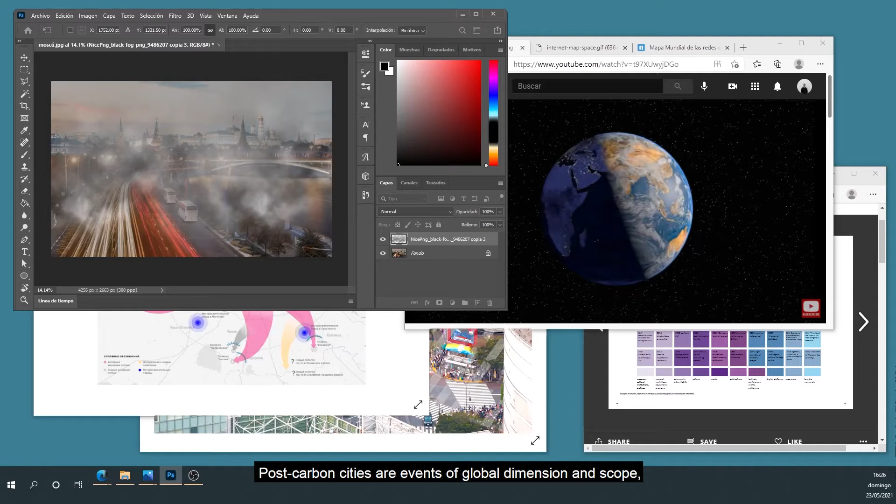Post-carbon cities are events of global dimension and scope, whereby architecture incorporates design flows, material, digital, cultural, and proposes alternative models that resolve future metabolisms of the planet.

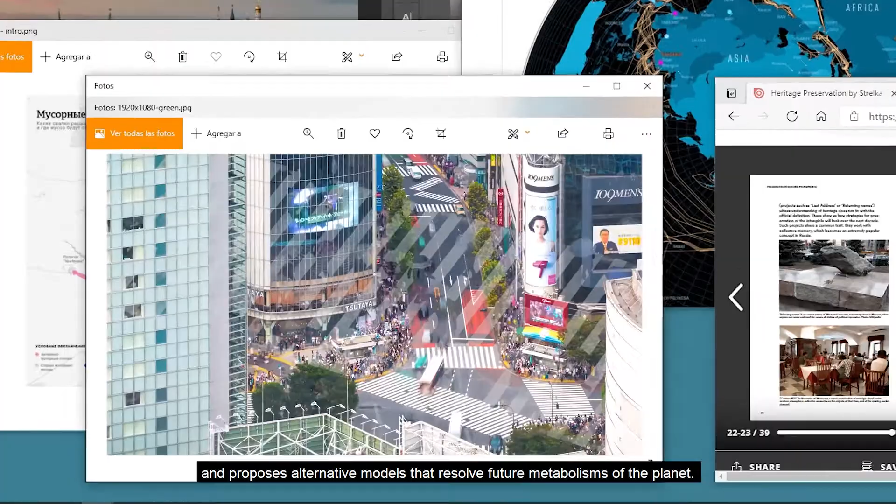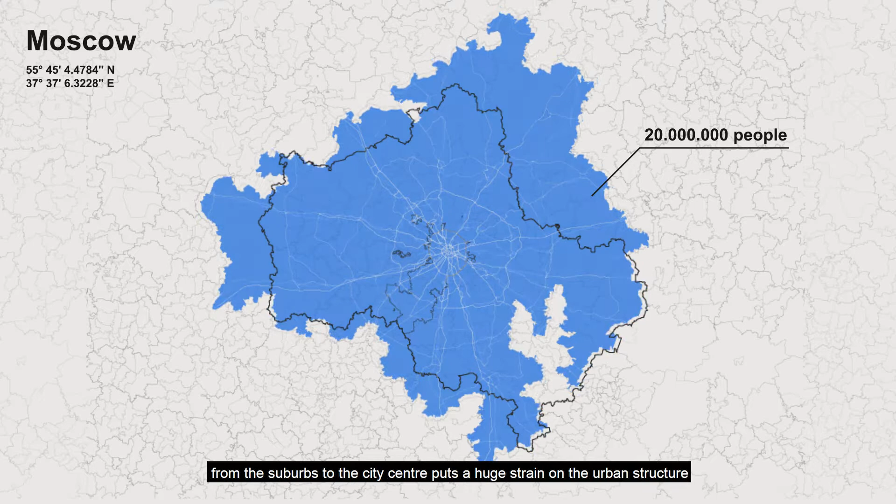The global growth predicted for the future is a social and urban challenge that is already affecting cities such as Moscow, where the movement of almost 8 million commuters from the suburbs to the city center puts a huge strain on the urban structure due to the increasing use of individual transport, which environmental consequences are already unfeasible.

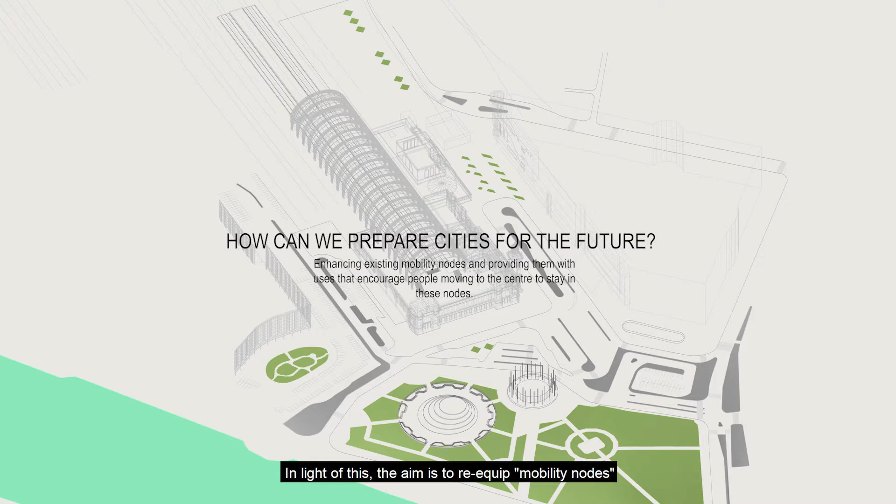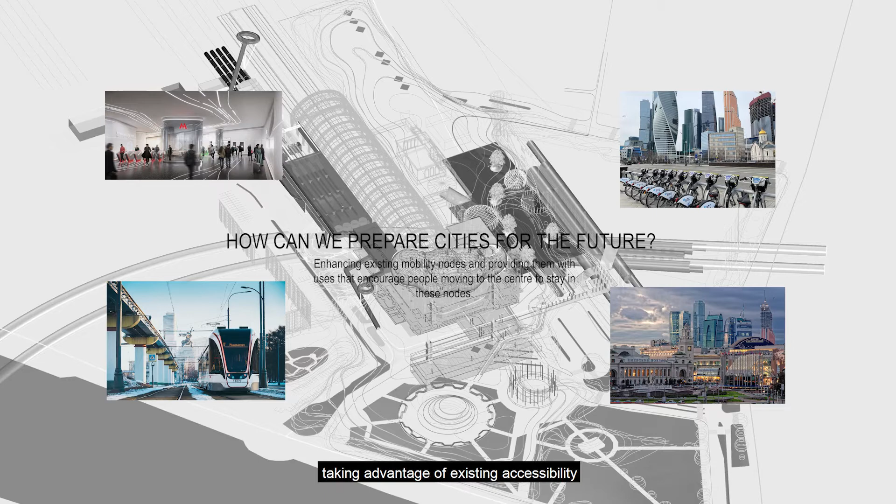In light of this, the aim is to re-equip mobility nodes such as Kievsky Station, which relate to initiatives that already promote the improvement of public transport on an urban and regional scale, taking advantage of existing accessibility to propose new necessary uses in a globalized future as a single intervention that provides a solution to three major challenges.

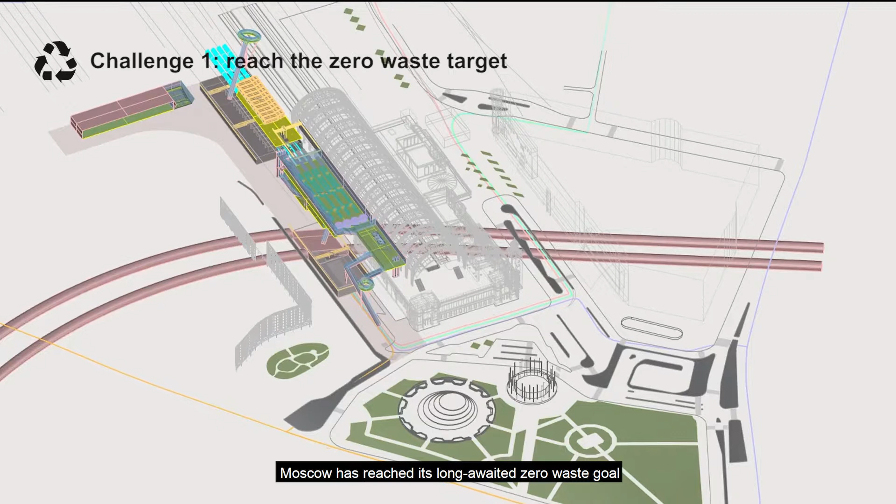Moscow has reached its long-awaited zero waste goal, implementing a series of decentralized waste sorting centers in each neighborhood.

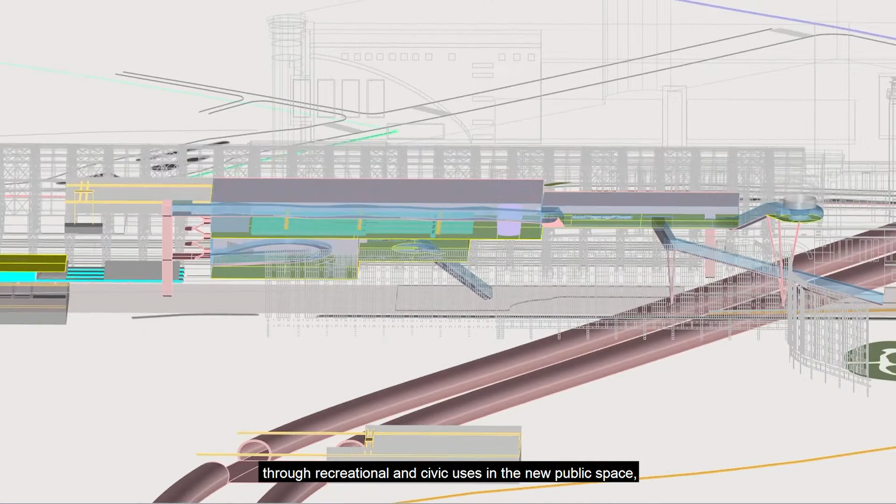The intervention solves its alienation by integrating itself into the station and the nearby urban fabric, with a welcoming and transparent character, allowing the visitor to walk through it, revealing in its stages those practices that reflect the population's feeling through recreational and civic uses in the new public space, which allows expressing artistic concerns with the reuse of materials or raising awareness, making use of the design workshops or the multipurpose auditorium.

Co-living for homeless people is nourished by the proposal through the reused equipment and furniture from the second-hand market, and a vertical farming, from which the inhabitants of the area can also benefit.

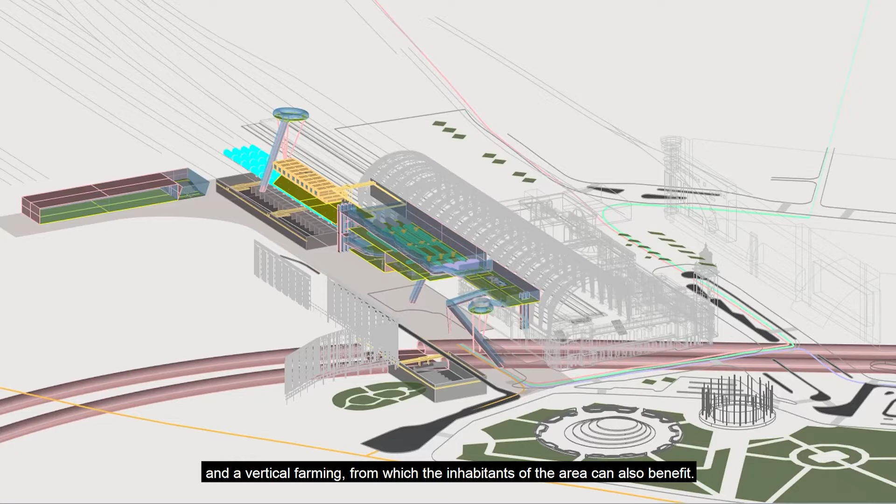Datascape is committed to digitally equipping the existing infrastructure where hyperconnectivity and data processing will be relevant in order to be able to provide coverage in the future to a great demand for real-time information.

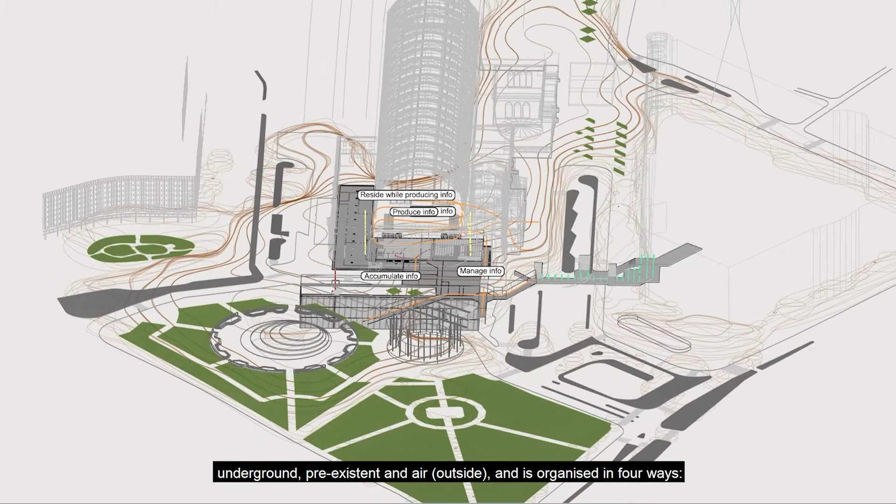The program is distributed on three levels: underground, pre-existing, and air, and it's organized in four ways. Accumulate information: a data center is proposed to support the station communication systems, as well as an archive for the growing protection of Russian intangible heritage.

Manage information: control rooms are proposed to monitor both the station itself and the rest of the city station. Producing information: professionalized spaces are proposed in the form of recording sets, classrooms, etc.

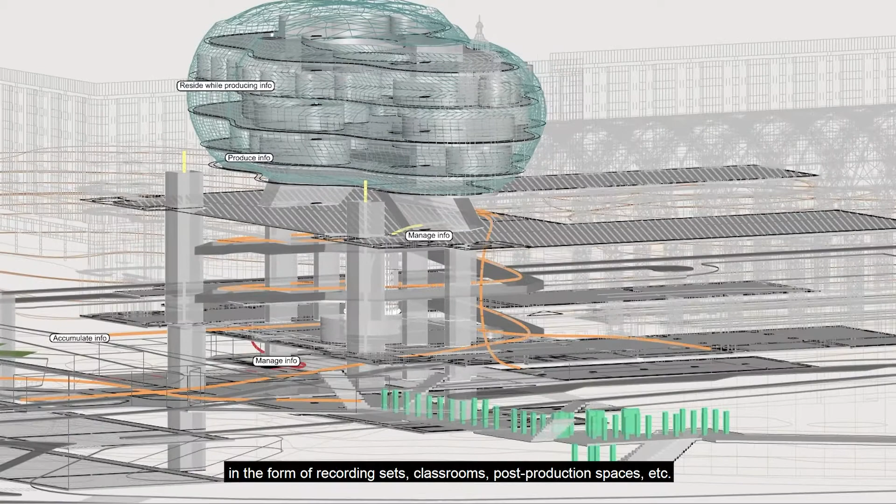Residing while producing information: a residence for content creators is proposed to promote this way of living, as well as domestic spaces for rent for the recording of all types of content.

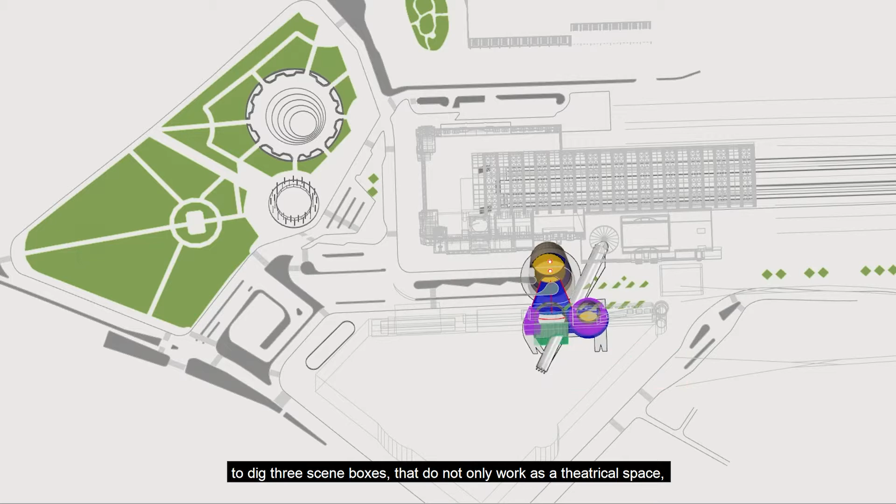In the north part of the station, the deepness of the metro is used to dig three scene boxes that do not only work as a theatrical space, but they also organize the rest of the program: a transport hub, dwellings, and other theater-related spaces.

These three nuclei help create new visual relations in all directions, revealing the infrastructural quality of the existing station, interweaving itself with it but without hindering it.

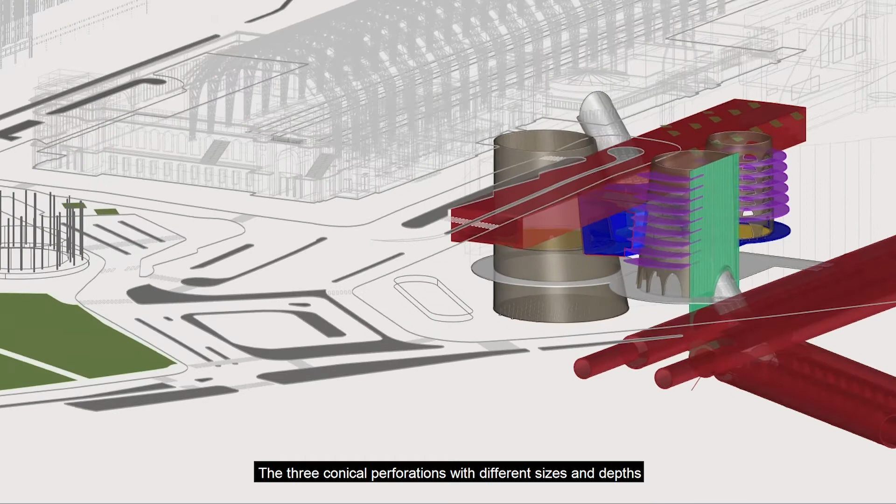The three conical perforations with different sizes and depths work as a serving space for three different theatrical typologies: classic opera, experimental, and urban. On the surface, the new plaza will be an elongated green pedestrian space with a superficial manifestation of the underground theaters and with the ability to showcase other performances on this level.

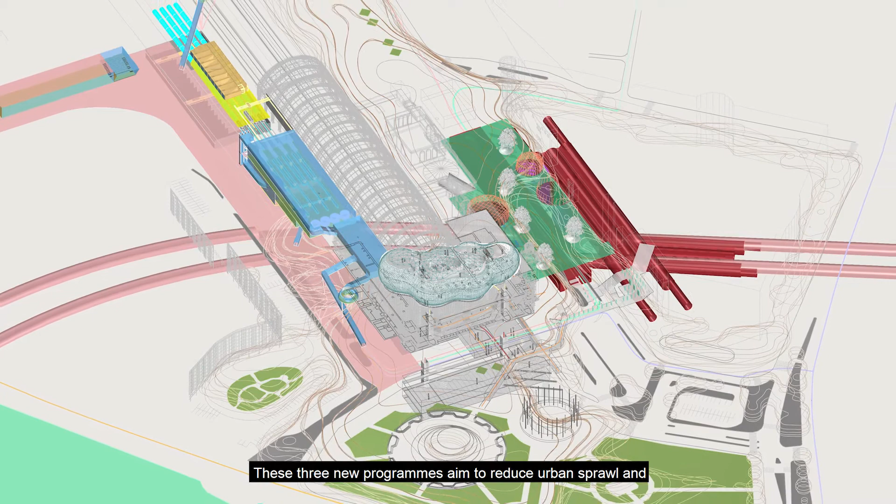These three new programs aim to reduce urban sprawl and the lack of housing in the city center by planning several types of dwellings associated with public recreational areas, healthy for citizens.